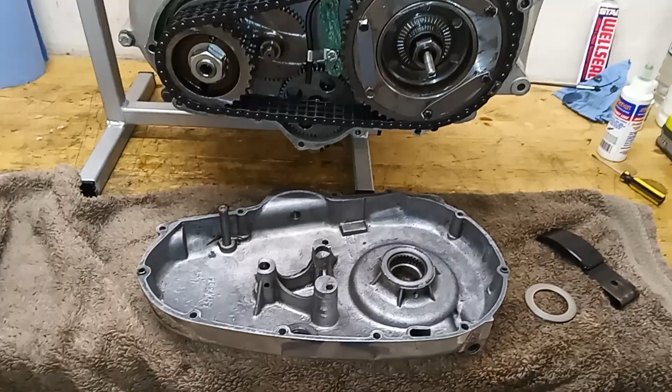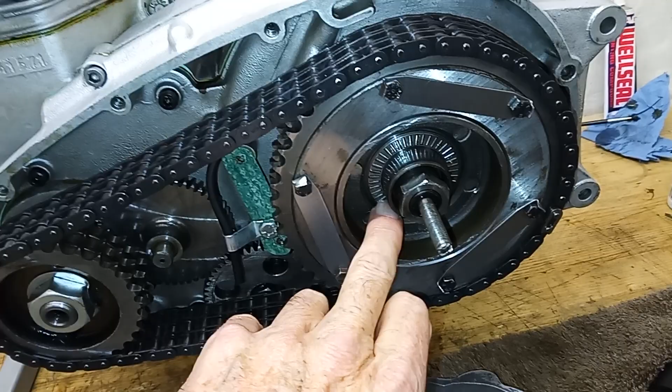Okay, so just getting ready to fit the outer primary chain case cover onto the engine, which is pretty straightforward now that everything's been done. All the nuts are tightened up, we've got our oil seal in there, and we have this thrust bearing here

against the shock absorber. I don't know if I've mentioned before, by the way, that if the spider is worn or these rivets are loose, there are companies that do a reconditioning service. I think LP Williams Triumph spares, I think they do a service. So if that spider is gone, then you can't buy it new, but you can get it reconditioned, I think.

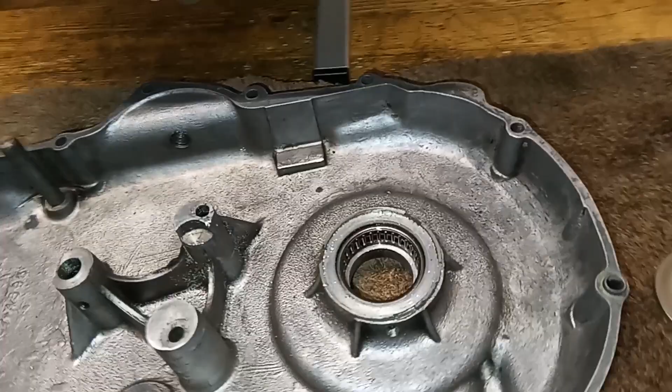Okay, so that's all in. We've got a new primary chain. Now in the outer casing, there's only a couple of things. We've got this needle roller bearing. Okay, that's going to go on or run on here. And then we've got this thrust washer here that will sit in there, and it will run on that thrust race there. Needle rollers there.

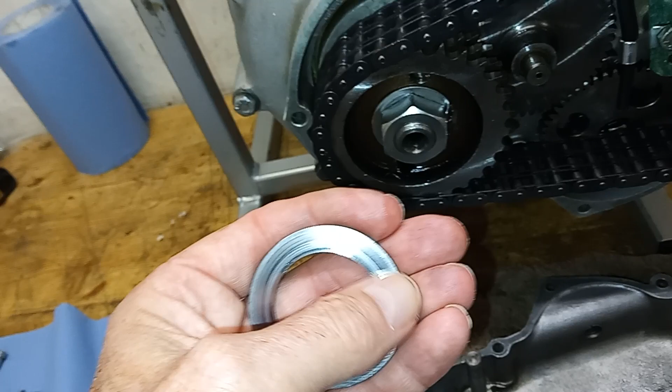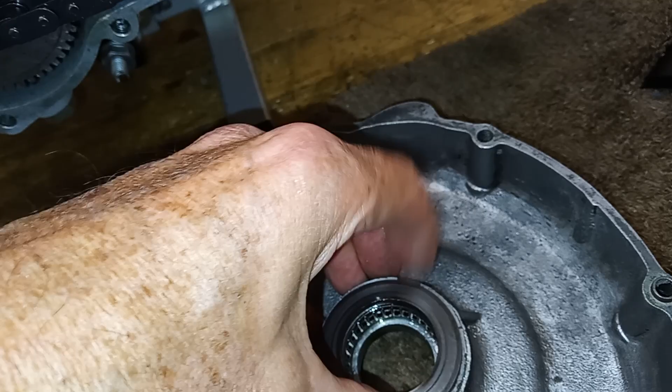Now I'm not sure. I think you can buy these new now. They were unobtainable. I think maybe they're available now, but basically they fit in there and they're crimped a bit, and so you often get little bits that are chipped off where I think it's been squeezed. They've been sort of squeezed in at the factory, and then over the years they've broken off, but it doesn't matter. Oops, focus, thank you.

Now the thing about these is that they do wear, but the advantage is that you can turn them over. And this one, there's signs of being worn, but there's no real appreciable wear on it. So I think this side looks better. So what I'm going to do is I'm going to put that back in there. I'm going to stick it in probably with some grease to make sure it doesn't fall out while I put it in. Then obviously we've got assembly lube on this bearing and that bearing.

Then I'm going to fit the primary chain tensioner, which simply slots on to this shaft here. And then the tensioning bolt will go up underneath, and it screws up and simply pushes against that, and that then pushes against the chain to tension it. So I'm just going to leave it so there's no tension at all on it once I put it on.

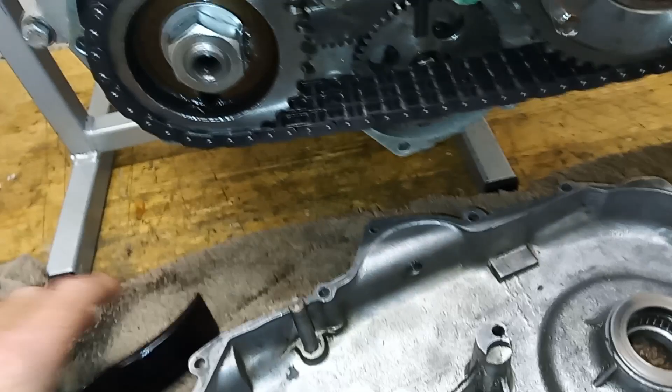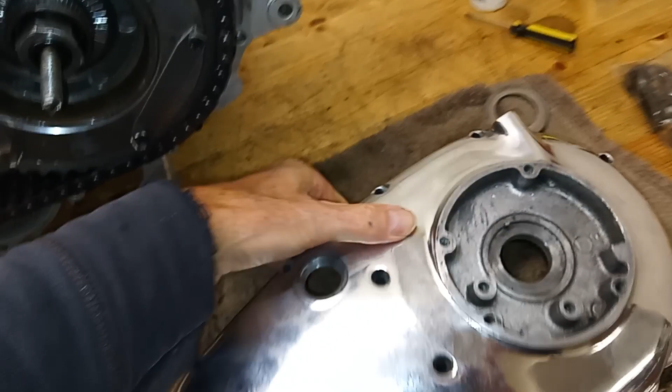Yeah, someone was asking about this. Earlier models had a completely different primary chain tensioner. Oops, daisy, that washer's come out. And so there's still a boss here. See, that was what was used for the early tensioners. And this boss here, I think, is now for the tensioner that we use. So I don't think that's there on early models. I'm not sure, but of course, being British, when they changed the tensioner, they didn't bother changing the actual casing, so the boss is still there.

Let's see if that. Yeah, does that fall? Yeah. Okay, and so what they used to have was a sort of rugby ball shaped affair, and it would be bolted to this extra strengthening plate here at one end, and there'd be a rod that would go through, and you turn that rod and it spread the sort of rugby ball, if you know what I mean, to tension the chain. Which didn't work great, so that's why they went onto this basic sort of slipper tensioner, which works fine. Okay, so that's one of the differences. As I've said before, I think they changed all the way through production, but there are certain times when things change quite a bit.

Right, okay. Yeah, so what I'm going to do now is I'm going to put Wellseal on that mating surface, Wellseal on here, get my gasket out. I'm going to glue this sort of in so it doesn't fall out when I'm assembling, and that's it. We should get the outer casing on.

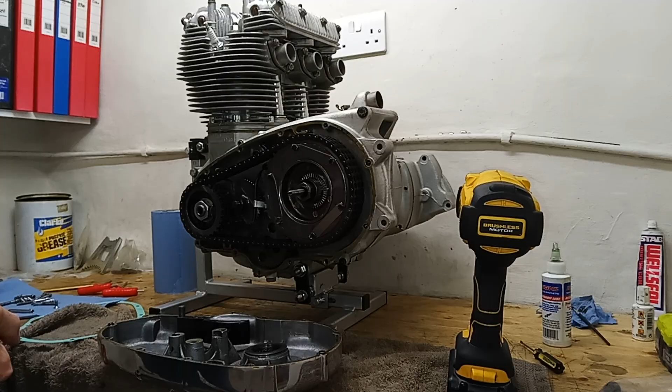Right, so I'm getting ready to put this outer case on. We've put Wellseal all round, and you might be able to see we've put Wellseal on these two pillars here, which are the two pillars that engage with the gasket that we put in there, and that just stops the oil going down and coming out of the two centre bolts in the middle of the casing.

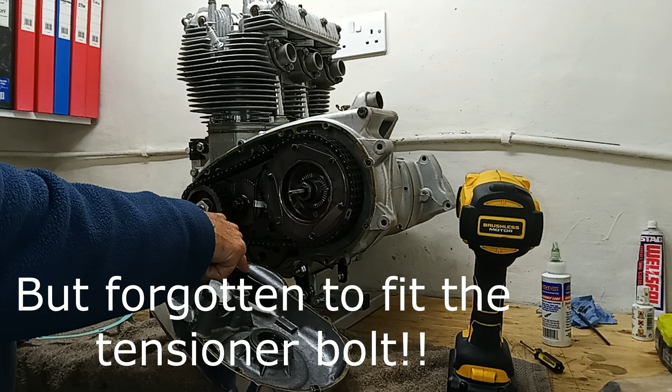There we go. Just slide it as best as possible so it mates up with the holes. Okay, as best we can do. And then we are going to just pop it on, and it should just slide straight on. Got that there. This spigot here that holds the tensioner, that will be locating first.

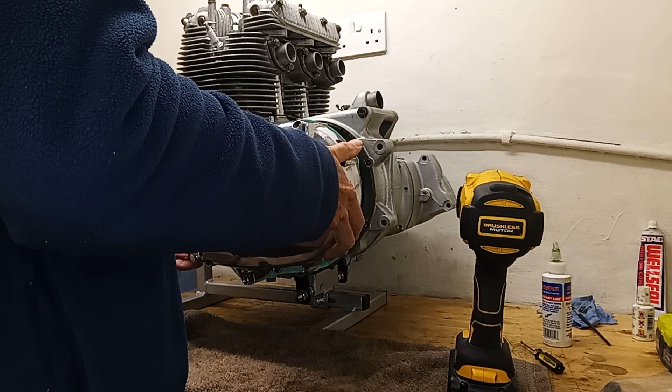There we go. Oh, okay. Casing on.

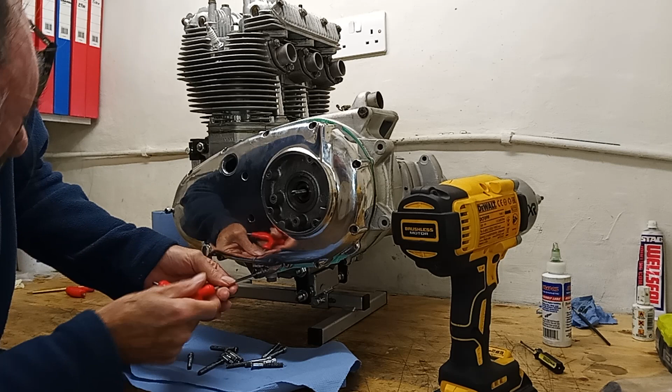And then we've got to fit the various casing bolts. There's a long bolt. From memory, this goes right at the front, in that very front bit there. There, it's located now. We've got two very small ones. Both go at the very bottom. Like that. Just putting things in loosely. I've got the wrong one in there. Should know better than that. So the small one goes at the very front there.

Yeah, so we've got a short one there, and then there's a long countersunk one that goes in there. So there's three countersunk ones at the bottom, and then all the rest are standard. But we've got lots of different lengths of this one. I'm struggling to remember which is which, but we'll find out. I think we've got two long ones in the centre, there and there. And we've got one shorter one, and all the others are the same length. So we've got one very long one there, short countersunk one there, short countersunk one there, long countersunk one there, two very long ones in the centre.

And then I think we've got a lot of different lengths on these. I should be able to remember, shouldn't I? But of course I can't. So I've got 5 longer, 2 slightly shorter, and 1 very short. So all I'm going to do is go round and pop them in and just check how far they stick out, basically. Let's have a look. It's definitely wrong. That's a long one. Wrong.

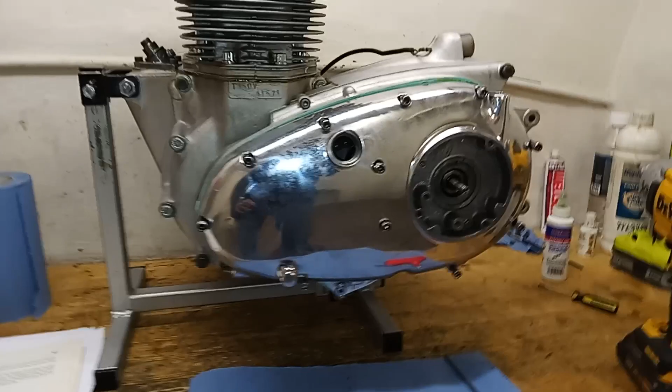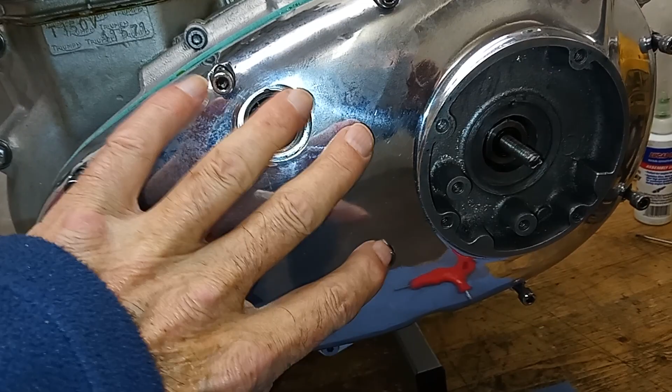Okay, so I'm just about to tighten up the outer casing bolts. So the very long one goes at the front there. Then 2 fairly long ones go in the middle. Then we have a short countersunk there. Short countersunk there. Long countersunk there. And then all the other bolts are sort of medium length, apart from that one, which is a bit shorter. Hold on, let's see if I can get rid of that.

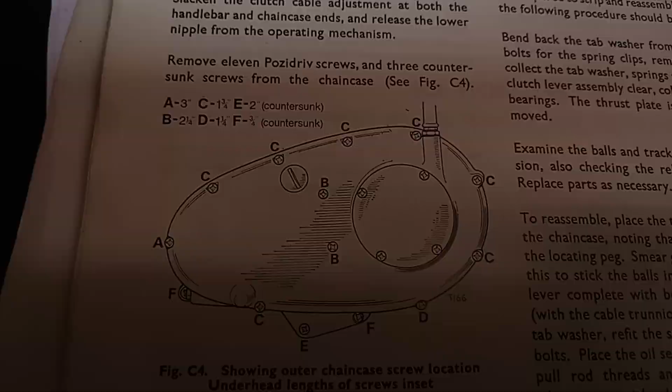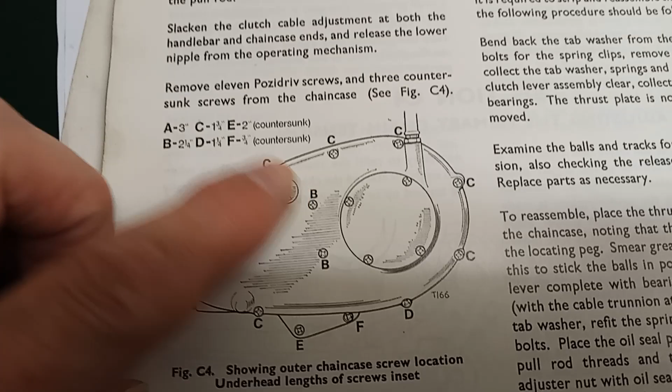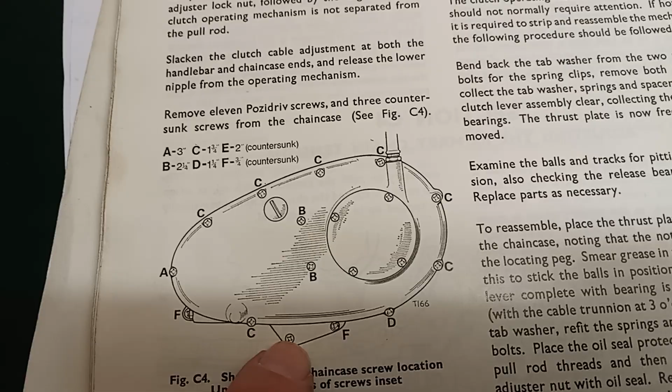So A, 3-inch, which is that long one at the front. B, 2 1/4, the ones in the centre. C, 1 3/4, so that's all the standard ones apart from that one. D is that one, just slightly shorter. E is the long countersunk, and F are the 2 short countersunks. So if you've got a workshop manual, it tells you exactly where things go.

In my case, everything was fine, except of course someone had put the wrong screw in. There was one that was actually too short. So I don't know what someone had been doing, but I'm looking at it thinking that doesn't work. Why doesn't that work? And of course I double checked with the manual, and simply someone had put the wrong screw in, which is fairly common. Right, so I'm going to do these up now, and then that's the casing on.

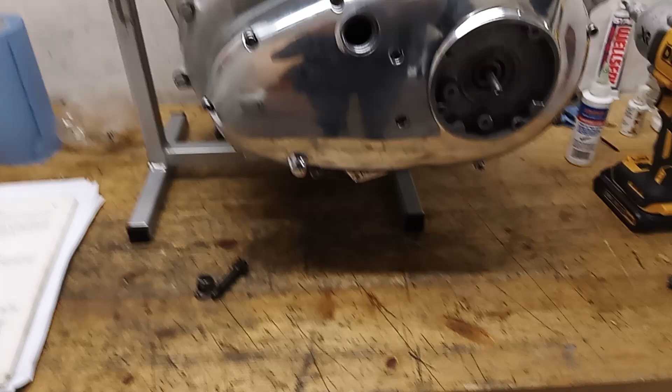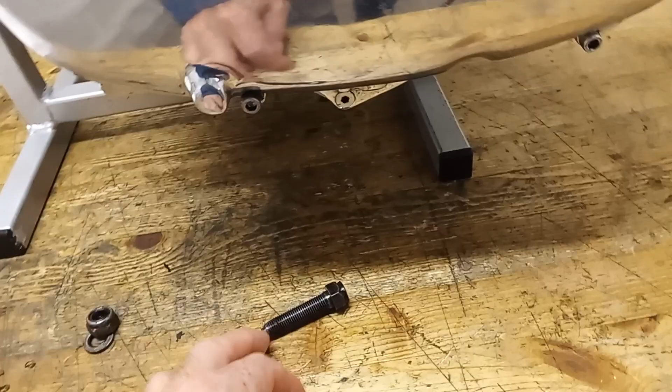Okay, so the primary case is all on, and I'm just getting ready to fit some of the extra sort of furniture on the outside, or at least I was. So I came to fit the tensioner bolt for the primary. There's a primary chain tensioner which screws up from underneath. So I've gone to screw it in, and I've realised I've had a complete brain malfunction, senior moment, whatever.

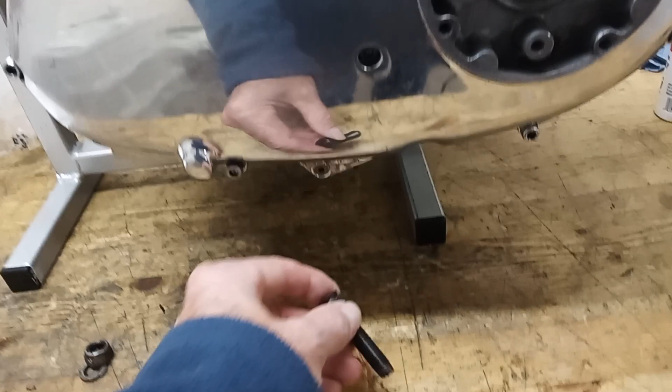Oh God! You have to fit the bolt from the inside first, Chris. The bolt screws down inside. You can't fit it once you've got the damn chain case on, Chris. I think you'd have remembered that, but you didn't, did you? No.

So I'm now going to take the chain case back off again. Now, it shouldn't be too big a job, but it's still a bloody pain in the backside. Stupid thing to do. Try not to rip the gasket. That's the main thing. I'll probably just heat the casing slightly to liquidize the Wellseal a bit. It's cold down here, because if it's liquid, it will just come off. When it's cold, it hardens a bit, that Wellseal, and then it might rip the gasket.

Anyway, got to take the chain case back off, then screw this adjuster screw down from the inside, then put the chain case back on, and then adjust it. But you adjust it obviously when it's like now, but you have to fit it before putting the chain case on. Wally, here we go, making more work for yourself. Back in a minute.

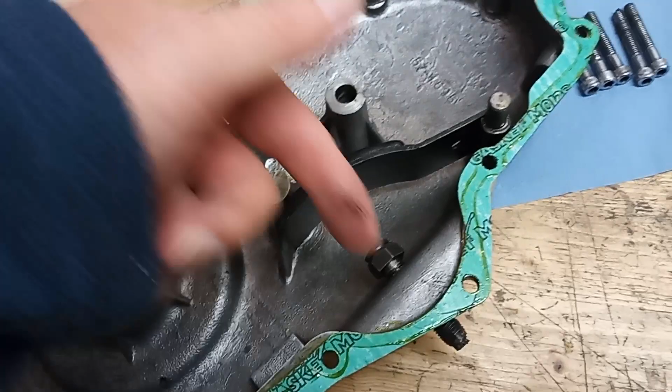There we go, managed to get the case off, and then obviously remove the blade, then screw the adjuster in so it's in its lowest position, and then put the casing on, and then we'll adjust it up. A tip from me, don't forget to put the adjusting bolt in before fitting the outer primary chain case. That's a tip from me for me.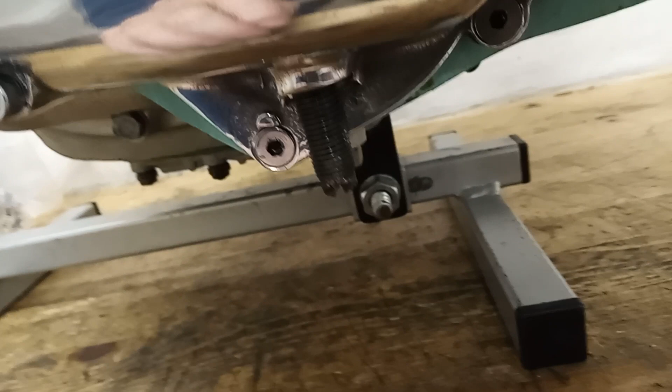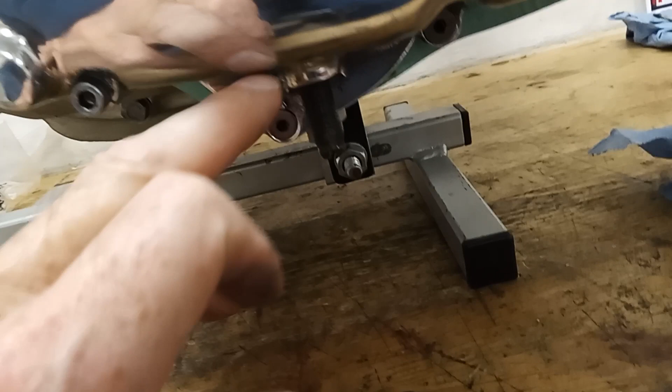Enough said. Right, so I had to re-Wellseal everything and so on, but anyway, the cover's back on now. And here is the adjuster bolt that I forgot to put in before. And then we've got a Dowty washer. That's the washer with a little oil seal in the middle of it, and locking nut, and we're going to put those on. And you adjust the tension of the tensioner by screwing that in and out.

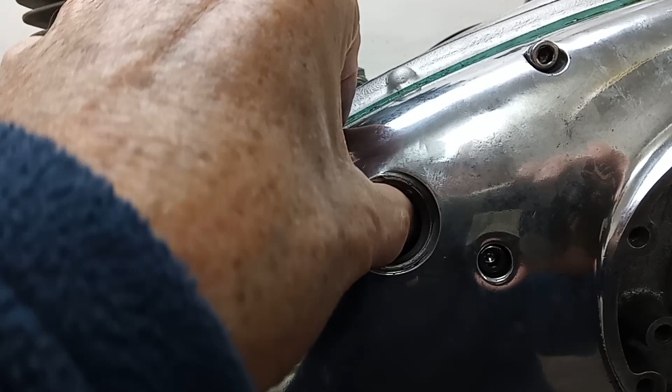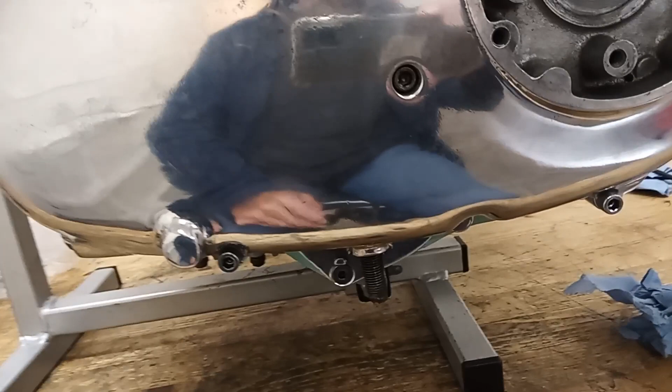And the actual tension should be about 1/2 inch play on the primary chain. So that's total, so 1/4 inch up and 1/4 inch down. Ours is right on that with no tension because it's a brand new chain. So I'm just going to leave this just off tight, and then that needs adjusting after a couple of hundred miles when things have settled in a bit.

So I'll put these two on. The main thing obviously is it's a bit like the tappets. You have to stop this turning. It does have a slot in the bottom for a screwdriver. Stop that turning while you're doing the nut up, otherwise you're changing your tension. Okay, so I'll get those two on and then recheck the tension.

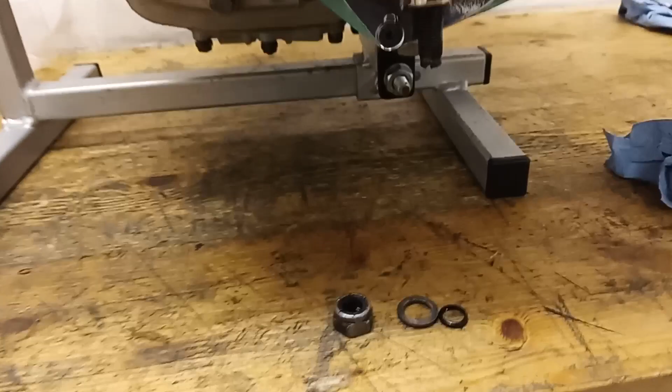Right, that's kind of spoiling the ship for a halfpenny worth of tar, as they say. So I didn't bother getting a new Dowty washer. I thought I'd just reuse the old one. But of course the old one, come to put it on, it's fallen apart and the rubber's solid, rock hard. Just for the sake of not bothering to change that, it gives you all sorts of problems.

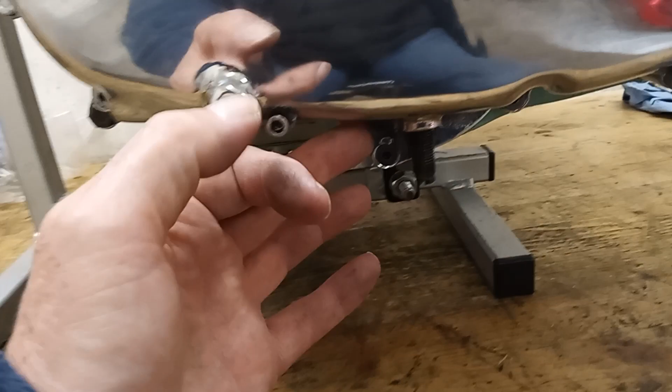Mainly it's just going to leak, and then you've rebuilt all the engine, you've got an oil leak somewhere. You're not sure where, but it's coming from there. So I should have replaced that. So I'll have to send away for a new Dowty washer somewhere. And then we'll do it. But, yeah, a simple little thing like that I didn't bother changing can make all the difference.